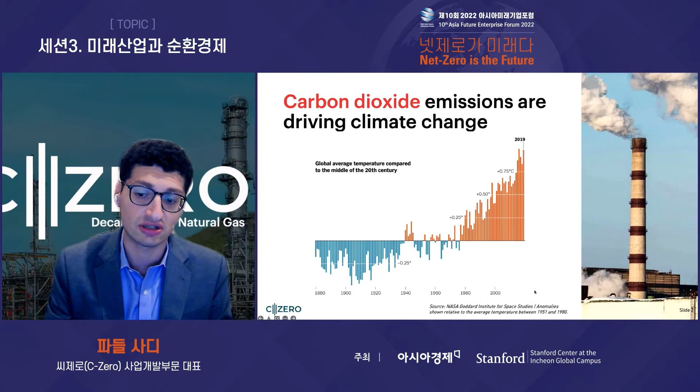And this is really because hydrogen is a potential solution to several different decarbonization needs. So you can use hydrogen for vehicle transportation. You can use hydrogen for synthetic fuels, for upgrading oil and biomass. We use a lot of hydrogen already for ammonia production and fertilizer production. We just heard how you could also use ammonia as a hydrogen carrier. So we have existing need for hydrogen and ammonia, and that might be increasing in the future.

In the metals and refining industries, they're looking at replacing some of their existing carbon-based reduction processes with hydrogen. You can replace natural gas heating with hydrogen heating. And one area that we're particularly interested in at C-Zero is replacing natural gas combined cycle turbines with hydrogen combined cycle turbines, or even simple cycle turbines if the demand and interest arise for that. And while hydrogen may not be the solution for every challenge at every location, we think it's undeniable that it will play a critical and lasting part in the decarbonization of the future.

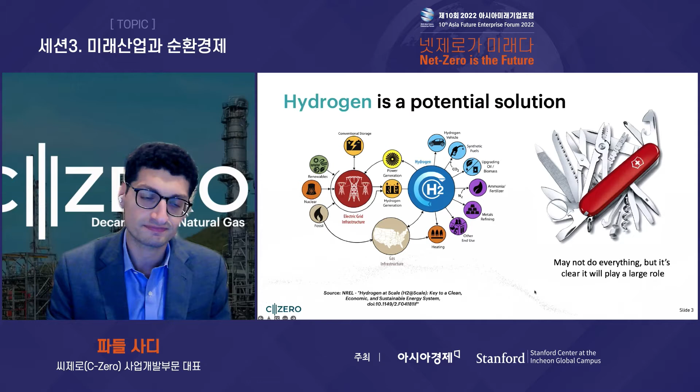So when people think about hydrogen sources, where do you get your hydrogen from? I think people usually think of two main ways. The first is conventional hydrogen generation through what's often called gray hydrogen, or hydrogen from a process called steam methane reforming and water gas shift. And this is a process where you take natural gas and you take water and you produce hydrogen, but you also unfortunately produce quite a bit of CO2.

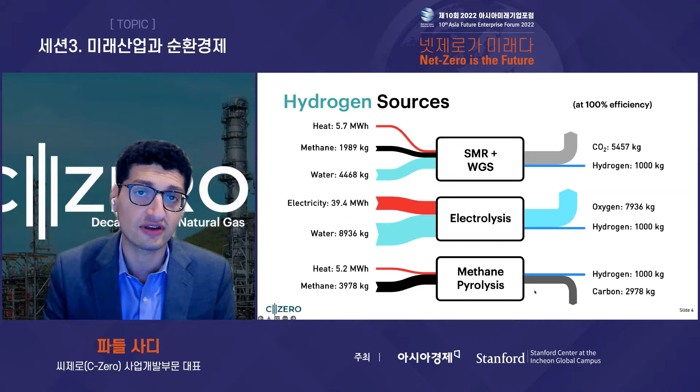In contrast, we're really interested in another process called methane pyrolysis, where we're taking the natural gas and we're producing hydrogen from it directly without CO2 emissions. So how does that work? Well, to start, we have to step back and talk about a misconception that we often see, which is that CO2 is the only byproduct of hydrocarbon energy. And that's not the case at all.

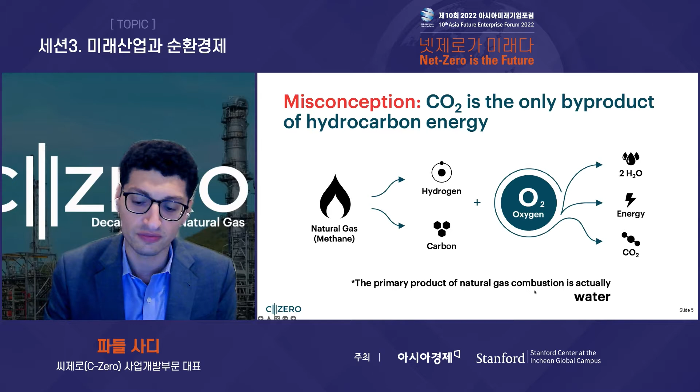In fact, when you take natural gas and you use it for energy, you produce twice as much water as you do CO2. So what C-Zero asks is, what if we could access just the energy in the hydrogen and leave the energy in the carbon behind? When you look at the total amount of energy in natural gas, 60% of it comes from the hydrogen and 40% comes from the carbon.

When we look at, say, total US energy production, you see that 60% of existing natural gas production in the United States would be 20 quadrillion BTUs, or about 20% of total energy production, 5 times current wind and solar here in the United States. When you look at Korea, the total amount of natural gas consumed in Korea is about 1.6 quadrillion BTUs. Converting that to hydrogen with methane pyrolysis would produce about a quadrillion BTUs, or about 10% of all of Korea's energy requirements.

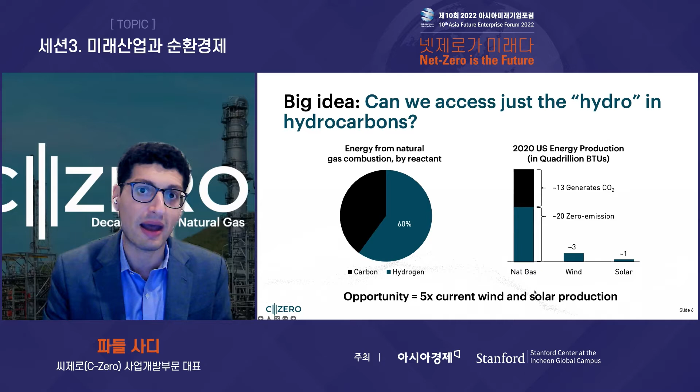So it's an absolutely massive opportunity here in the United States and in Korea. It's also important to note that when we start with renewable natural gas or natural gas that started off as biomass, this process goes from being carbon neutral to being carbon negative, where we're taking CO2 from the atmosphere, we're sequestering it in the form of biomass and renewable natural gas, and then separating out that carbon and hydrogen to produce carbon negative energy.

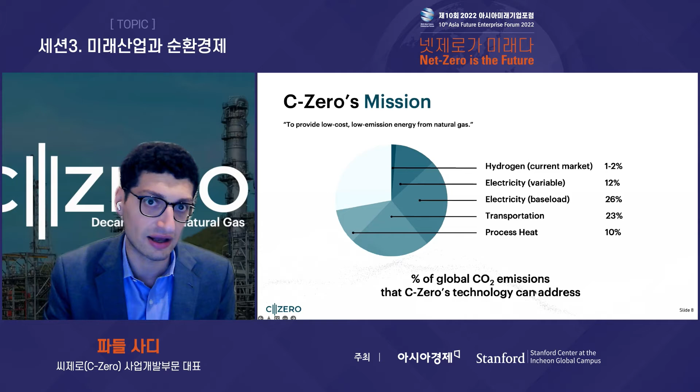So just a little bit about the company. We were founded in 2018. We're located in California. The work really starts back in 2016 when our CTO, Professor Eric McFarland, started researching this at his lab before we decided to take it to commercialization. Since then, we've raised about $50 million with some amazing investor base. And in particular, I want to thank SK Gas, who are our most recent investors and have been an amazing source of not just financial support, but also technical support.

And one thing that we really are impressed with at C-Zero is the seriousness and the dedication that SK Gas is showing to creating a hydrogen economy. So that is something that we are very impressed with, and one of the main reasons why we were so excited to have SK Gas join us in this mission. And we're still a small company with a growing patent portfolio.

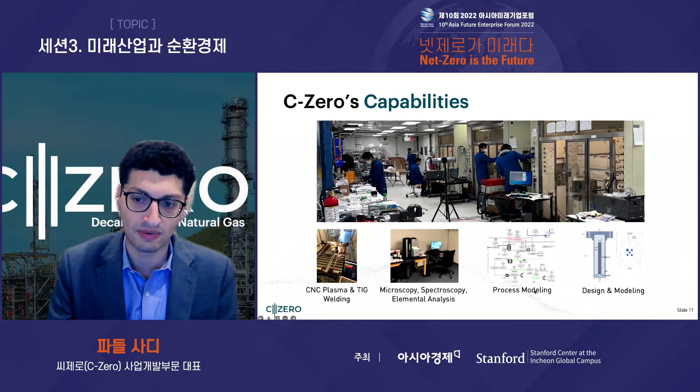So just a quick slide here on our facilities and capabilities, which of course are, for a 20-person company, significant, but for a university, still rather small. And luckily for us, we are located right next to the University of California, Santa Barbara, and we are able to leverage their resources as well. But we have several walk-in fume hoods where we can test and pilot systems. We've got ability to cut metal, to machine prototypes, to test rapidly. We've got spectroscopy, microscopy, and elemental analysis tools like scanning electron microscopes and XRFs in order to analyze what we are producing and to look at things like corrosion and materials of construction, able to do extensive process modeling and design of our processes as well.

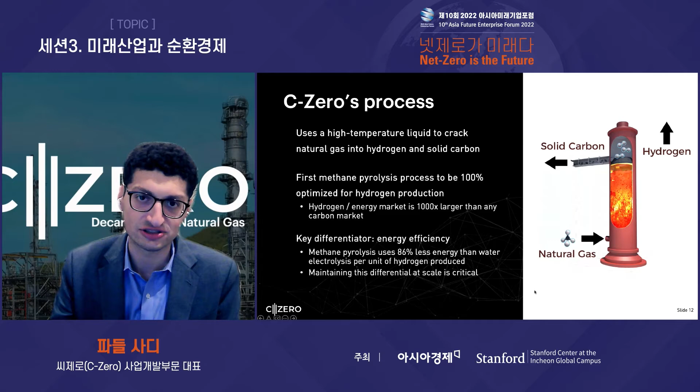If you recall at the beginning, I talked about how electrolysis requires quite a bit of energy to split water into hydrogen and oxygen. It requires about 40 megawatt hours thermodynamically. In real life, it requires usually north of 50. In contrast, methane pyrolysis requires 86% less energy than electrolysis per unit of hydrogen produced. But that's if you're careful and if you're close to the thermodynamic minimum for methane pyrolysis. So we believe that maintaining that differential is going to be critical as we scale up this technology.

Now, here's just a very simple video from an old experiment that we have that just allows you to see this occurring in real life. So what we're doing here is we're bubbling methane into a high temperature molten system. That methane is being split into solid carbon and hydrogen. And then that hydrogen and carbon are leaving the reactor and are being separated out by these cyclones. And so you can see the carbon is being filtered here at the bottom, and the hydrogen is going to the end use that you want to use the hydrogen for.

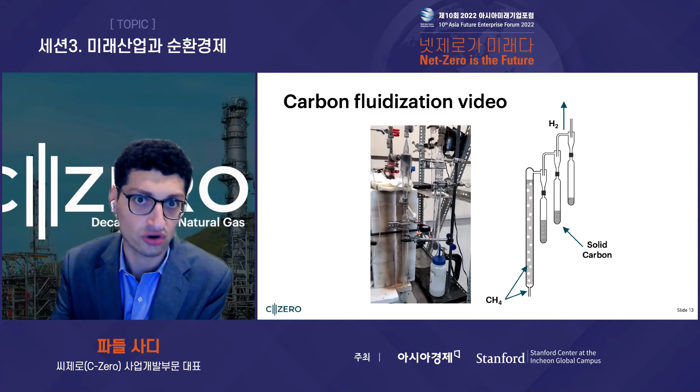And what's important here to note is that the carbon that you're seeing here is carbon that was originally in the methane. This is carbon that would have been converted into CO2 had we not done this process right now. So it's a very visible way in which you can decarbonize your natural gas. This is a method of natural gas decarbonization where you're producing a solid where the carbon accounting is very simple and very straightforward. You can credibly take that mass of carbon and say, this mass of carbon would have been CO2 had I let it combust in, let's say, a turbine, but instead I am removing it and then I'm using the product hydrogen instead, producing no direct CO2 emissions.

So here's a high level schematic of the process, where what we're doing is we're taking 1 gigajoule of natural gas. So it's about 1 million BTU. We need some amount of energy. As I mentioned, it's still a process that requires energy. We need about 0.2 gigajoules of heat for every gigajoule of natural gas. And then we produce 5 kilograms of hydrogen and 15 kilograms of solid carbon.

It's important to note here that 15 kilograms of solid carbon are equivalent to 55 kilograms of CO2, because CO2 is only 27% by mass carbon. The rest is really oxygen. So CO2 sequestration is really oxygen sequestration. And this can be thought of as a more pure version of CO2 sequestration or carbon sequestration.

The other thing I want to talk about is the fact that unlike water splitting or electrolysis, we have the ability to provide the energy for this reaction from different energy sources. So we need heat, but that heat could come from anywhere from natural gas to hydrogen to electric heating. So those are all options that we have at our disposal, and all ways that we can actually provide the heat depending on the customer, depending on their needs, depending on what they are looking for. So of course, if you're using natural gas to heat this process, you will produce some amount of CO2, but the amount of CO2 that you'd produce would still be a 75% reduction compared to existing steam methane reforming processes. So it'd still be a significant reduction in CO2 intensity.

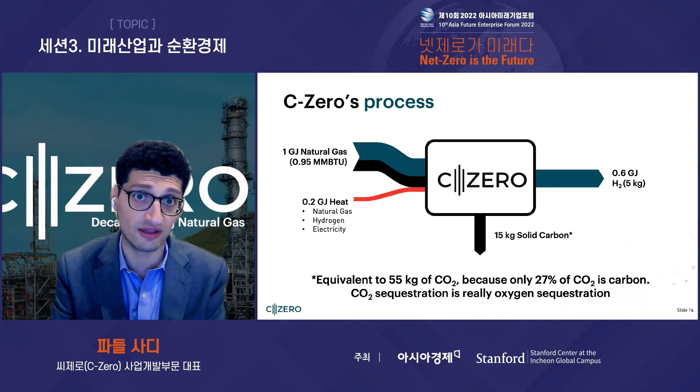So where are we today? Well, at C-Zero, we're working with world-class EPC firms to build our first pilot that we plan to have online the first quarter of 2023.

And the main focus for this pilot is really demonstrating the scalability of this process, where we're going from the lab. If you recall the video or the images that I showed you earlier of our lab in Santa Barbara, where you're only able to build essentially test stands that can produce maybe 10 kilograms of hydrogen a day, to processes where we're able to produce 400 kilograms of hydrogen a day at pressure.

And it's, of course, important to note that anytime you're producing 400 kilograms of hydrogen a day with methane pyrolysis, you are by definition also producing 1,200 kilograms of carbon a day. Because even though 60% of the energy in natural gas is in the hydrogen, 75% of the mass is in the carbon. So when you are doing methane pyrolysis, you are producing 3 times more carbon by mass than hydrogen every single time.

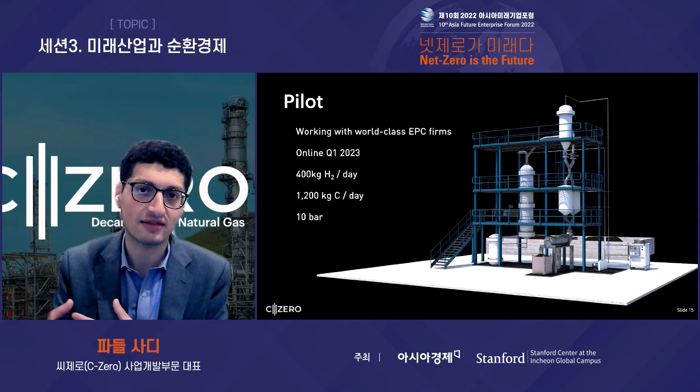We are also working right now to design our second pilot, which will be an order of magnitude larger in throughput, so 10 times larger in throughput than this first pilot. And that one is going to be the one that we really hope shows the commercial readiness; essentially it will be the first commercial unit for our process. So we don't think that this pilot unit that we're building right now is of a commercially viable scale, but we think the next one that we're building will be. And that's the one that I'm showing right here.

So again, as I mentioned, we're first working on our pilot for Q1 of 2023. And then soon thereafter, we will begin developing and building out our second pilot, which we hope to be fabricating in 2024. And that one will produce at least 10 times more hydrogen than the previous one. And that's really what we believe is the minimum viable scale for our hydrogen process.

So we don't see this as being something that is viable for, say, 50 kilograms of hydrogen a day or 100 kilograms of hydrogen a day. We really see this as being a process that's best suited for several thousand kilograms of hydrogen a day, up to hundreds of thousands of kilograms of hydrogen a day. And we also think this is critically important because in order for this to really make an impact on reduction of CO2 emissions worldwide, it needs to be scalable.

When you think about the amount of hydrogen necessary to even decarbonize a single combined cycle turbine in Korea, you are talking about a methane pyrolysis or a hydrogen generation facility that is producing several 100,000 tons a year of hydrogen just for that single turbine. And so for that reason, all of these hydrogen generation processes need to be scalable.

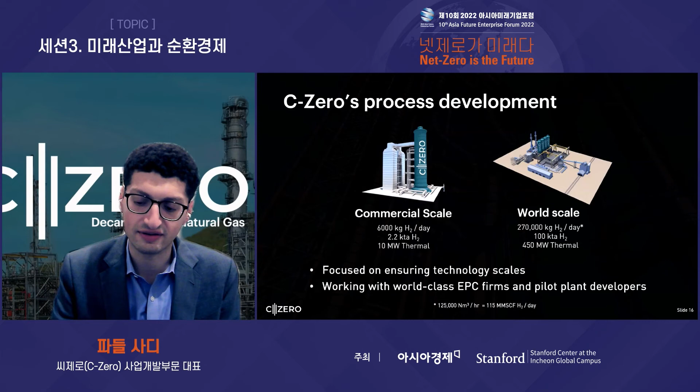I also want to touch briefly on a common question we get, which is, what do you do with all of the carbon that you produce? As I mentioned, existing carbon markets are not large enough to absorb all of this carbon. So we think there are two different possibilities. In our base case, we think this process should be economically viable if what we are doing is sequestering the solid carbon. So you can think of the carbon sequestration as an alternative to CO2 sequestration.

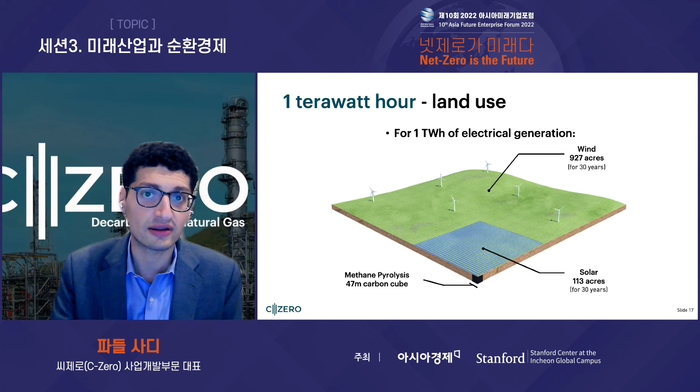And so while it might sound like a lot of carbon, in reality, we will always have some sort of waste product from zero emission electrical generation, whether that is CO2 in the form of CO2 sequestration, or solid carbon from methane pyrolysis, or even decommissioning solar panels at the end of their life. There's just no getting around the fact that all of these processes will produce some amount of waste.

Now, with all of that said, we are also looking at potential uses for the solid carbon. And we are specifically interested in uses with markets large enough to absorb the amounts of carbon that we're discussing. So it's not existing carbon markets that we have today, but could this solid carbon be a positive when added to soil? So a soil amendment-like material, that is something that we are exploring. Could the carbon be used in cement or in asphalt to improve their stability, to improve their mechanical integrity? That's something that we're exploring.

Could the carbon be used as a low-grade activated carbon alternative, where you're actually using it to do site remediation, in places where you have landfills, and what you want to do is prevent leaching of different materials in your landfill? That's something that we're also looking into. So just to give you a sense, those are the kind of scales of carbon markets that are interesting for us.

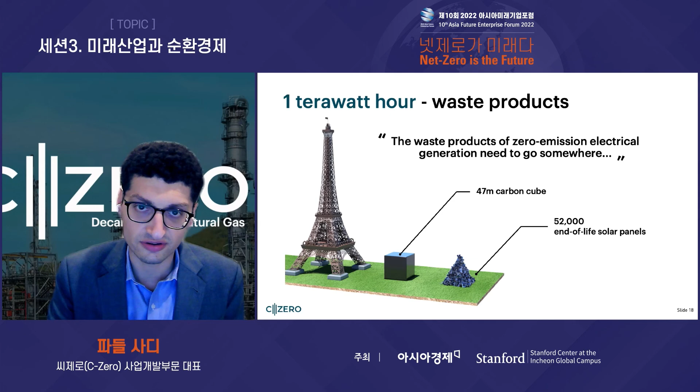Unfortunately, as much as we'd like to, the carbon markets for things like batteries or carbon nanotubes or carbon fiber are just orders of magnitude too small to be really commensurate with the amount of carbon that we'd produce if we were successful at C-Zero. And so while it's interesting to study those carbon applications, they're likely not going to be long-term solutions for our carbon. So I'd just like to summarize.

C-Zero, our process, really unlocks the zero emission potential of natural gas. We think of it as pre-combustion carbon capture. So instead of producing CO2 and then having to sequester it and potentially transport it, we simply remove the carbon from the natural gas before it is produced. We also believe that solid carbon is superior to CO2 for several reasons. It's significantly denser than uncompressed CO2, unsurprisingly, because it is a solid, not a gas. It's lighter than the equivalent amount of CO2 because it doesn't have any oxygen along with it.

It's easily transportable. Anywhere you've built infrastructure, you know by definition that you can get solid mass to that site and out of that site. So it makes it much cleaner. You don't have to worry about potential geography challenges. You don't have to worry about building a new pipeline. We already know how to move solid mass around. And it can be sequestered anywhere. You don't have to worry about geological formations.

And where we are right now is we're moving to pilot with an experienced scale-up team with some great partners, investors, collaborators, including SK Gas, who have been truly wonderful to work with.